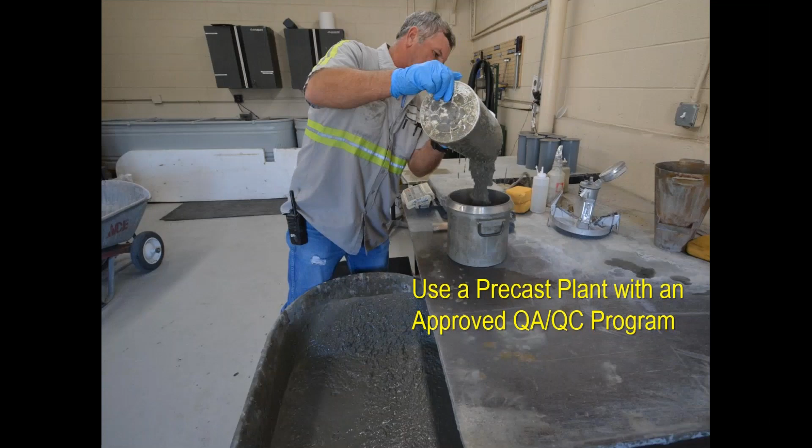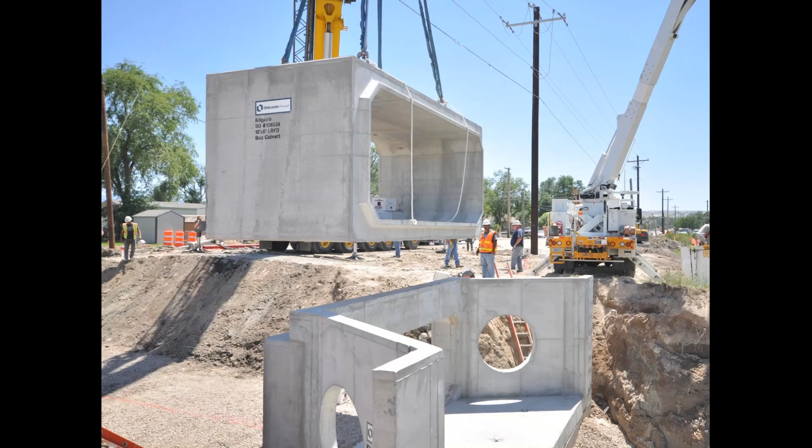One of the things that's important in this process is to use a precast plant with an approved QA/QC program. There are different programs out there, and different manufacturers have their own programs. So that's where we'd ask you to coordinate with them and see what is typically done in your state. That's really important. It's one of the things that is really well done with our product, we're able to do in-house QA/QC.

Now, this is a project that happened about 10 years ago, and I'm going to talk about this just in general so you can get a feel for what we're talking about. This was a 3-lane highway, and a city wanted to update the box or the piping that went across this road for a canal crossing.

And when they came and did this, it was designed originally, and you can see this here, it was designed to go across this 3-lane highway, and they were going to widen that out to a 5-lane section. And when they got their first plans in, they looked like this.

And Jason, I'll ask you, what would be the first clue on this that it's not a precast box culvert? Well, when I look at the detail there that says section through barrel, I notice there's no haunches in that detail. Right. So this was designed as a cast-in-place box culvert by the consultant, which was fine.

And the city came to us and said, 'Can you do a 16x9 box or a 16x6 box culvert for this crossing in precast?' And we said, 'Sure, we can. That fits what we have in our standard forms.' And the city said, 'Well, we really want to consider that because of the time savings.'

He said, we're concerned that when we go and have to shut down this highway, we don't want to deal with the residents. There's a lot of neighbors out there. This could take a month if it was cast in place and we could be shut down, where how long would it take you to do in precast? And we said, well, you could probably set this in a weekend, which is what they ended up doing. And with that, they were able to open that up to traffic again very quickly.

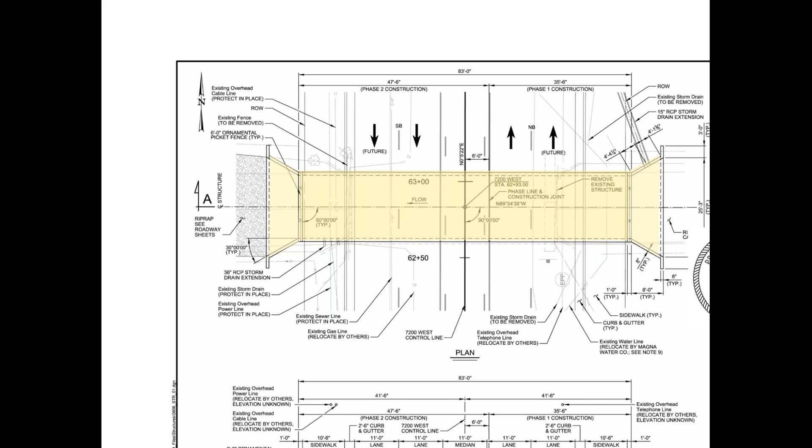In the industry, we call this accelerated precast construction. It's a concrete industry term. It really goes back to FHWA and AASHTO. They're looking for Every Day Counts. We need to maximize and speed up our construction. And in FHWA and AASHTO, they refer to this as accelerated bridge construction.

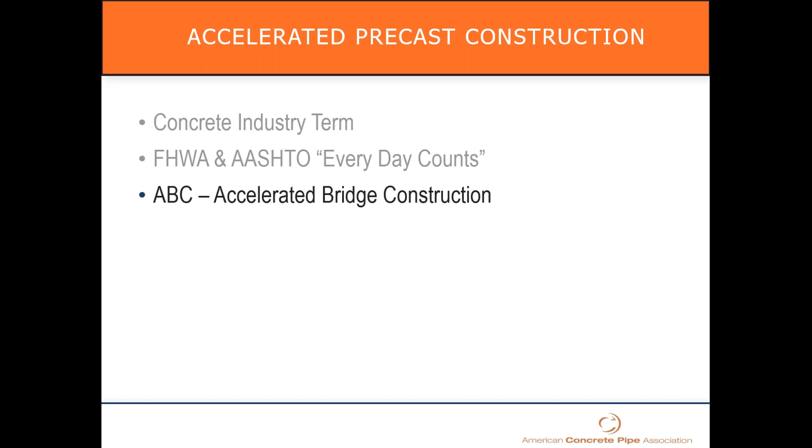But we like to point out that accelerated bridge construction is not just girders and overhead things, but some of these underground structures. What that does is when we use innovation to schedule and design and manufacture and do all those things, it reduces our on-site construction time. It reduces our costs. It improves safety.

One of the things that's great about doing things in an indoor climate-controlled manufacturing plant is that we have less accidents and less lost time on that. There's many of these plants that will go years without a recordable accident. And that's so much more difficult to do when you're out on a highway, when you're out in the elements.

There's also a reduction for road user impacts, these costs of people sitting delayed in traffic. So that's what we're kind of talking about today.

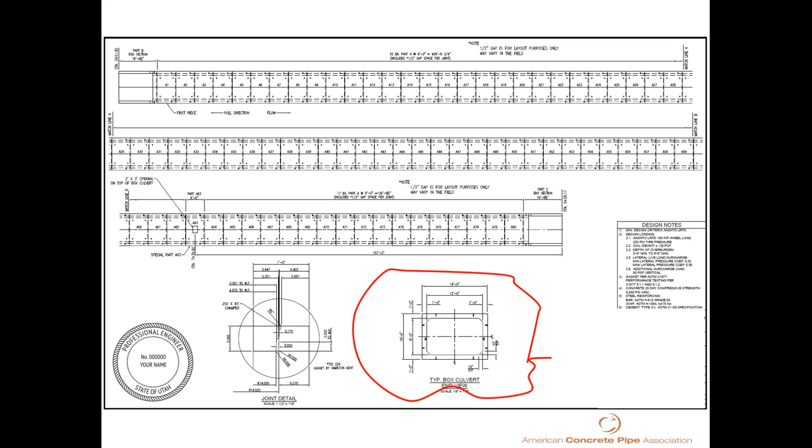Now, when you go out to a precast manufacturer, one of their responsibilities is to give you the layout and the design. You can see here that this is the typical section for a precast box. This will show the haunches in it. You might have other things in the design, openings for manhole access or maintenance access. You may have elbows or other things that come into this process.

The manufacturer is also going to give you a steel design. You can see here that he's laid out how he wants the steel done, which is specific to how he's going to build this. So it's important that the manufacturer have a hand in that. This is what he would be submitting. It's important to have that stamped in your local state and have an engineer that understands what he's doing. Most of these plants have an engineer on staff or someone they work with that understands the precast standards that we're going to talk about.

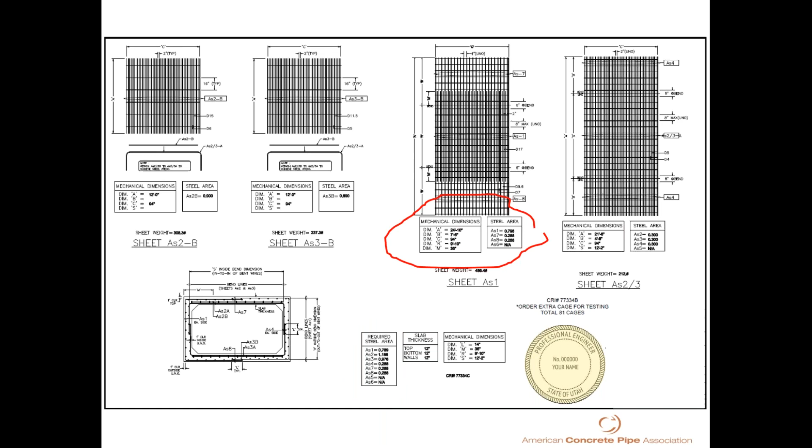You can see in here that he's done calculations to determine what the required steel area is. Now, as he does those calculations, he may go out and order the steel in such a way that it meets or exceeds the required steel. And that's what he's going to put in, and that's some of the things you'll check in a submittal.

Let's talk about the terminology. Let's say someone wanted to order a box culvert, and a lot of times they'll call me and say, I'd like a 6x12 or a 12x6 box culvert. Now, Jason, I'm going to put you on the spot. How should they do that terminology-wise? The span should be listed first, and then the rise or the height should be listed second.

Okay, and a lot of times we know, because typically for canals and other things, it's wider than it is high, but sometimes there's other things going on. So that's one of the things we always tell people. The other thing is the dimensions are internal dimensions. They're typically, most people's forms are usually set up in even foot increments, although there are options to do those in different increments depending on what's going on.

Hey, Randy, so Jason, why don't you take the lead? Oh, okay. A little pertinent to what your previous slide was before the rise and span. The question is, will this webinar be advising on the manufacturer's design principles and the number of recommended or required clips and steel design? Say that last part again, Kim. I believe they're wondering how the manufacturer does the design. Are you advising on that today? Well, Jason's going to jump into the design specifications and where the calculations go. We're probably not going to get into how the manufacturer does, calls out the steel and all that detail. That is not for today, but why don't we go through this a little bit more, and then some of these questions may get answered as we go. So, Jason, why don't you take over?

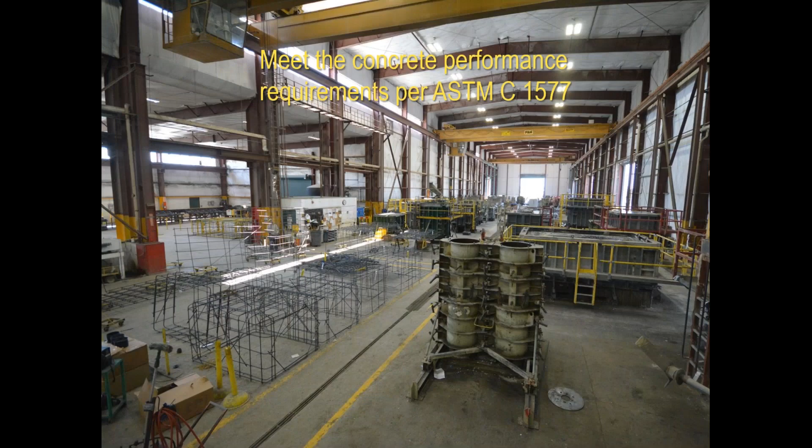We'll talk about some of the things with 1577, but then we'll also get into special design considerations. One thing that 1577 references is that we'll be using a 5,000 psi compressive strength. That is required for 1577. Additionally, you want to meet the concrete performance requirements that are laid out in ASTM C1577.

This next slide is just a picture of a table that is pulled directly from the specification. So this is the 12 by 8, 12 by 9, 12 by 10. It ranges in different sizes, but I just grabbed a few of these tables so you can see what you're looking at when you open up 1577. If you notice on the left-hand side, you've got the design earth cover. As I mentioned before, ASTM C789 would have been from 2 feet to 25 feet, and then 850 was 0 to 2.

So this has them combined. This can go from 0 feet of cover all the way down to 25 feet of cover. So that's on the left-hand side. And as you move across the page, you've got your steel areas, your AS1, AS2, all the way up to AS8. But if you notice, there's 3 numbers there: 12 feet by 8 feet by 12 inches.

So Randy, I'll put you on the spot. What is that 12 inches referring to? 12 inches is the thickness of that typical box culvert section. Okay, so that would be all the way around - top slab, walls, and bottom. Is that correct? That's correct.

Now I want to put you back on the spot, Jason. What if we had to go deeper than 25 feet? That's a great question. If we had to go deeper than 25 feet, we would have to do a special or modified design, and we'll talk about special designs in just a little bit.

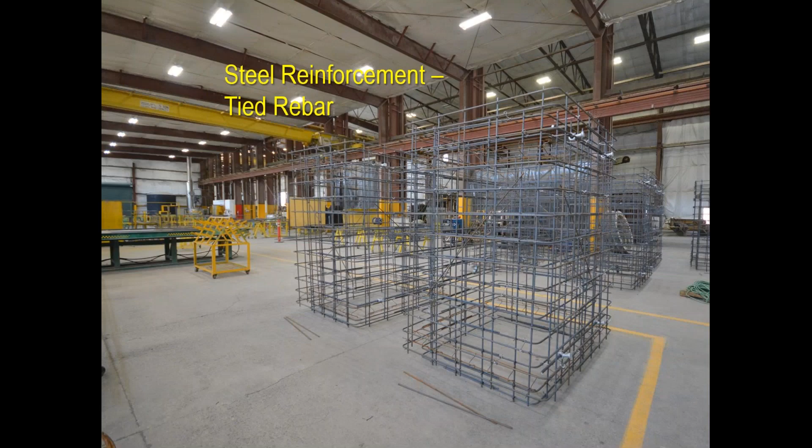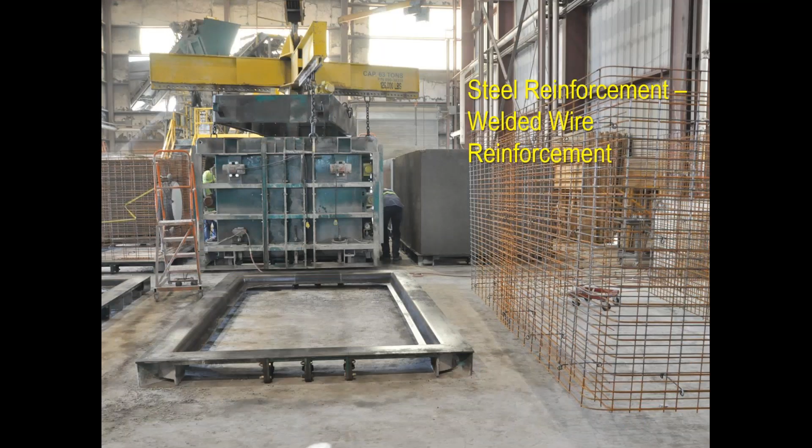So next we'll talk a little bit about reinforcement. There's 2 different types of reinforcement. This is a tied rebar - this is very common. Most of us engineers remember doing designs with rebar in college, and this is very common, and we use a lot of tied rebar. But there's a second type of reinforcement as well, and that is a welded wire mesh or welded wire reinforcement.

And what this is, this comes in sheets, like big sheets - it's like a welded wire mesh. You fold it and you bend it to fit the configuration of your box.

Now, one thing to keep in mind, that manufacturers need to look at when they're doing this, is rebar and welded wire reinforcement have different yield strengths. So if you're designing, or if a manufacturer's designing this to use rebar, and then they decide to use welded wire instead, they have to modify their design and change that because of the difference in the yield strength there. That's what manufacturers will keep in mind, and we'll talk a little bit more about that design and how that affects in just a little bit.

But I think Kim has a poll question for our manufacturers. We were just curious to see who - Jason, you may want to point out which has the higher yield strength, though. The welded wire actually has higher yield strength. Yeah, which Jason, a lot of people before don't know.

I launched this poll question, we got a couple of folks that had a couple of different questions related back to your chart that shows the different steel, the AS5, the AS2. They wanted you to go back over that.

What each one is used for. Okay, absolutely. Yeah, I think I got three different questions about that.

Okay, Randy, if you go back one slide further, and let's look at the table again. So these areas I should have pointed out, I apologize.

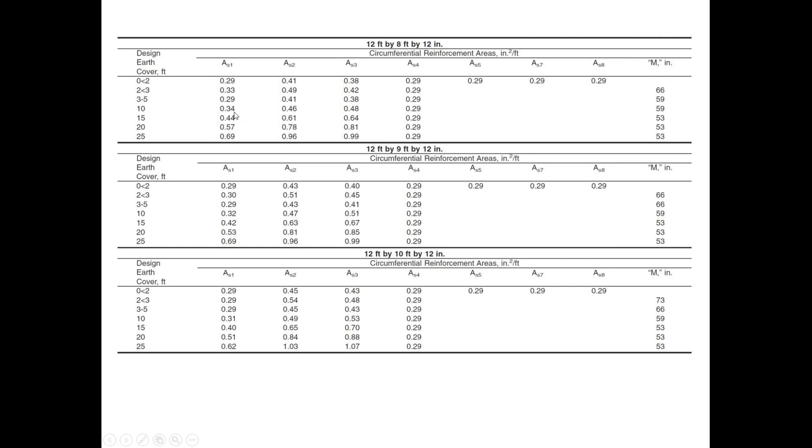So if you look at the AS1 column, let's say we're looking at 10 feet of earth cover, and we go over to AS1, we're at 0.34. That is 0.34 square inches per foot. So that's what that steel area is. And then as you go over, so AS1.

Now let's go back and look at the other drawing, or the other section. So AS1 would be that outside cage. It would go all the way around it for the 10 foot because it's just that outside steel cage.

AS2 is going to be your bottom, so that bottom reinforcement there on that lower cage, on the inside cage on the top slab.

Okay, let's go to AS3 there, Randy. So AS3 then is your bottom, but it's the bottom slab, and it's the inside cage there.

So those different areas, if you notice, some of those areas in that table are going to be different. So as you go through, you can't just say, well, we'll just put this much rebar, number 5's at 10, and put those all the way around it.

The manufacturers have to check and make sure that they're pulling the right design off of there, and they're determining what those steel areas need to be, not only just for the inside cage and the outside cage. Sometimes they can be similar, but at times you could have 6 or 7 different steel areas depending on where you are in the box.

So it's very important that the manufacturers are checking that table and watching it, and it's very important that the municipalities and the states are inspecting those to make sure we've got them right as well. Jason, that brings up a good point.

The point being, as a manufacturer, we may look at that and put higher steel in some of those, just because it doesn't make sense manufacturing-wise to split them all out. So we have to look at each box separately, and each manufacturer may do it a little bit differently. So right, that's a good point.

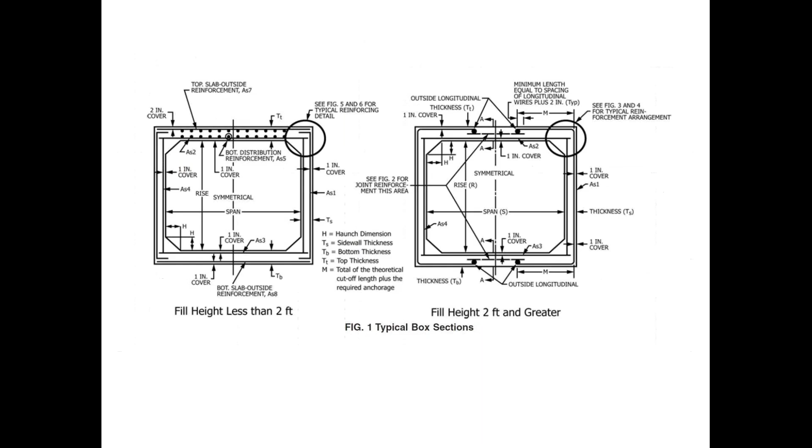The AS5 is the steel that goes longitudinally along the box, so that goes in each span. So if you've got a span, a lay length of 6 feet, that would be 6 feet of steel that would go along the lay length of that.

Does that make sense? So AS2 and AS5 are perpendicular to each other. Correct. Clarify.

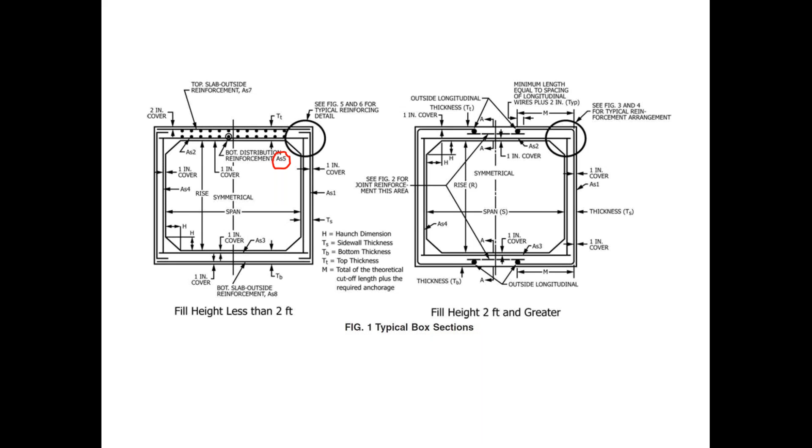Okay, well, let's keep going, and then some of these questions may get answered, and some of these may be another webinar that we do, maybe in more detail. This one's meant to be kind of an overview of how you would specify things. As a designer, you wouldn't need to specify any of that. You would probably need to be reviewing it and coordinating with the manufacturer.

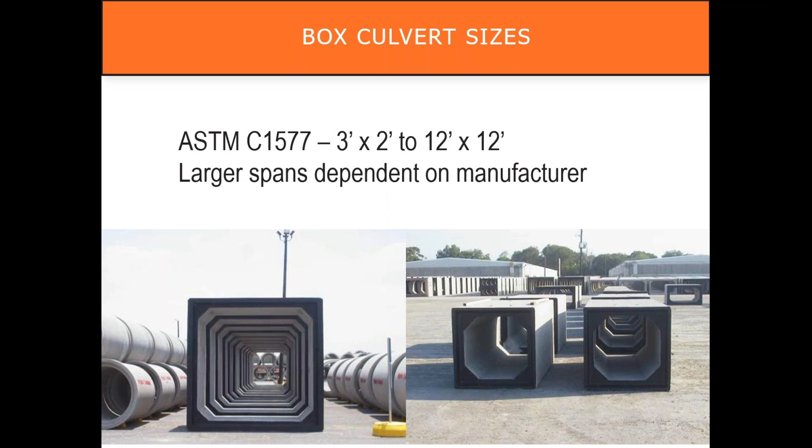So Randy asked the question earlier, well, what do we do if we have one that's over 25 feet? Another question would be, what if we need a 15 by 10 box or a 20 by 10? What if it won't fit in those sizes? That's when we need to look at a special or modified design. So a special or modified design would apply to any sizes that are not included in that table, like I discussed. If we need any modified thickness, if a manufacturer decides they can do their own design to change that thickness a little bit, so they can maybe save a little bit depending on the design and loading.

Also, if you do have different loading from what is put in 1577, as I mentioned, ASTM 1577 is an LRFD design, but sometimes we have to do airport loading with FAA, railroad with AREMA, or if they're really deep fills, there may be some different loads that we're not taking into account. So that's when we would have to do where our manufacturers would do a special or a modified design.

So when we do those, there's a few requirements that we look at and a few things that our engineers are reviewing when we look at these. First of all, we want to make sure they're a rigid frame and that there's 2 cages, we provide 2 cages in there. It's very important, and I'll show you why in a moment, why we need the 2 cages. And we're going to go through these pretty quickly because I'm going to go through each one in a little bit more detail.

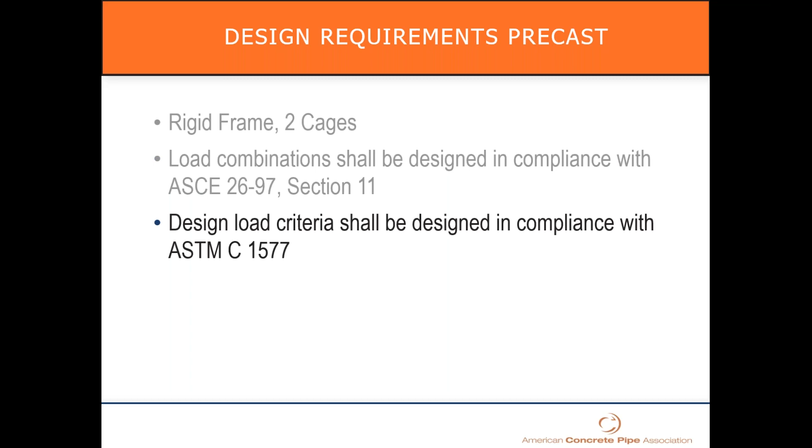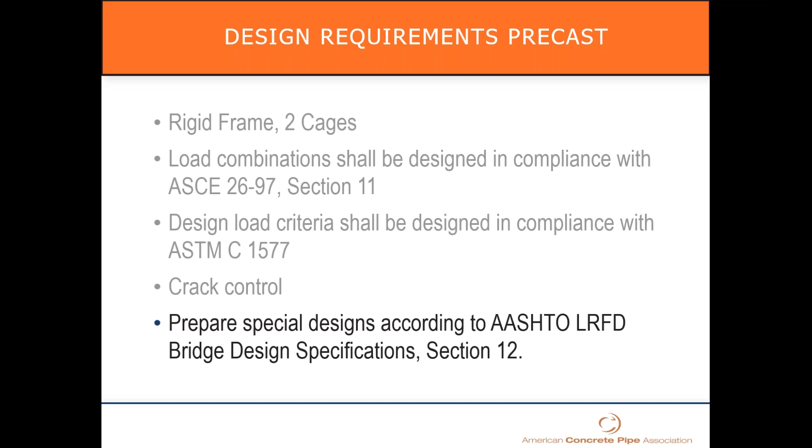So your load combinations are included in the ASCE 26-97, as I mentioned earlier. Design load criteria is included in C1577, and I'll show you what that design load criteria is. We also want to talk a little bit about crack control, that's something our engineers are taking into account while we're designing these. And any special designs need to be prepared according to AASHTO LRFD section 12, where applicable, obviously. But that's what we're recommending, and that's what we're doing in our market here.

So this is just a sample moment diagram. And the reason I show this, and I wanted to show this, is because you can see that you've got moments going from positive to negative. And so the worry is that if you're putting the steel in and you're only putting 1 cage in and you're putting it right in the middle of the box, you're kind of missing the positive and negative moment zones. You're missing those areas where it really needs it.

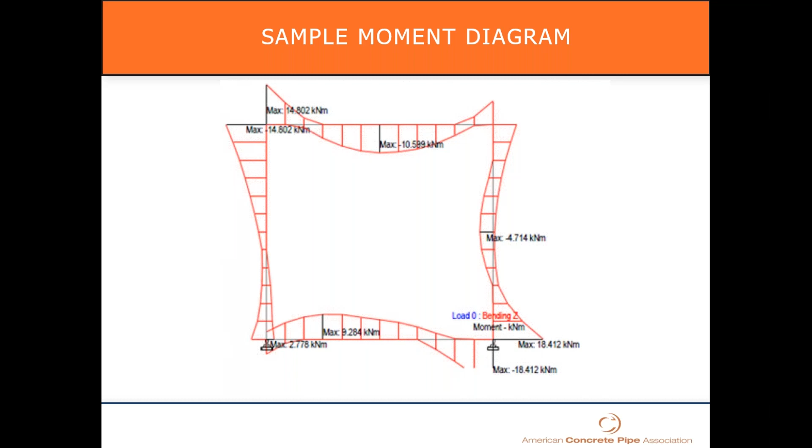Additionally, those moments kind of bend around the corner. So it's really important that we have the right amount of steel and the right number of cages, because if we only have 1 cage of steel in there, you may be missing some of these other high moments. If you've got the cage of steel on the inside and not one on the outside, then you're missing those positive moments around the outside there and around the corners, because that's where that moment shifts. And so that's why I show the sample moment diagram, because it changes a little bit there.

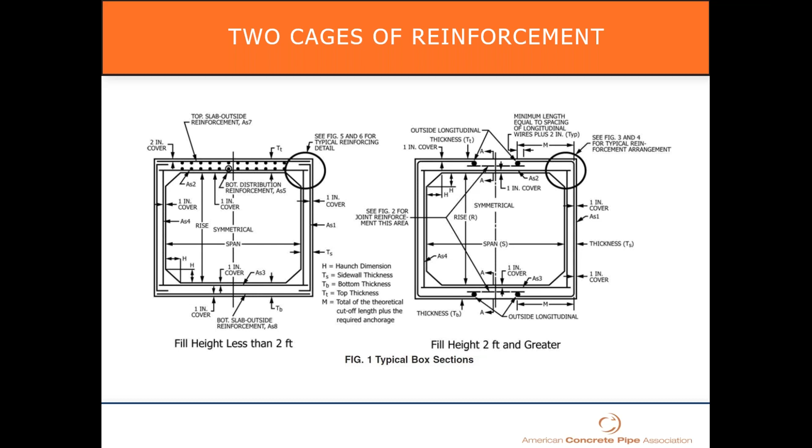This spec, again, we just looked at this, but if you notice on both of these, they've got the inside steel and the outside steel going around it. So this is ASTM C1577, it shows the 2 different cages of steel, 2 specific cages. So that's why we recommend that you do everything with 2 cages of steel.

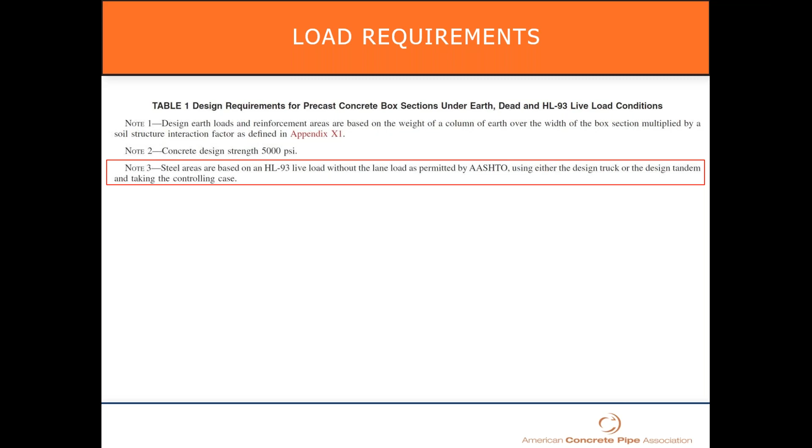This is the load requirements from C1577. If you notice in note 3, we already talked about the strength of 5,000 psi earlier, but note 3 is where I want to focus here. These are designed, the loads are designed on an HL93 live load. However, it's designed without the lane load, so keep that in mind. It's HL93, but you don't have to take into account the lane load.

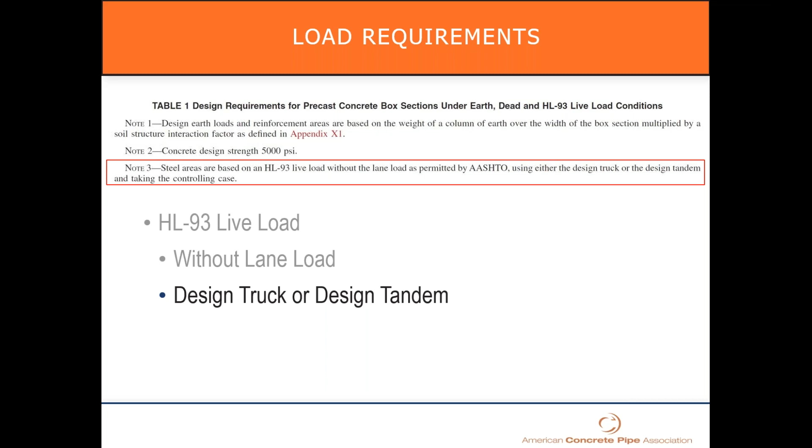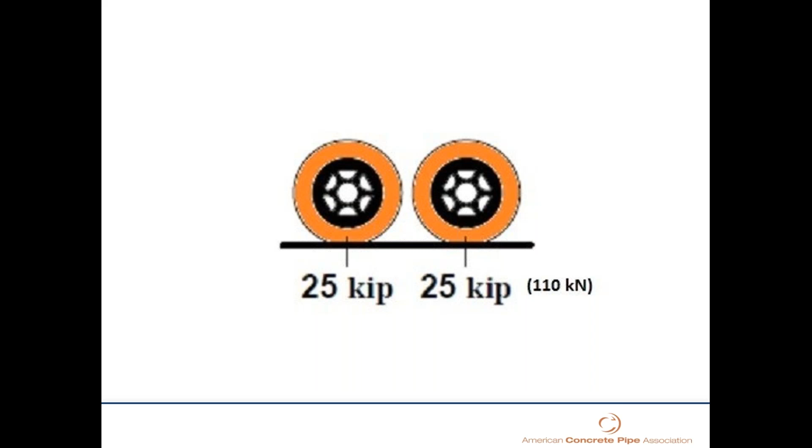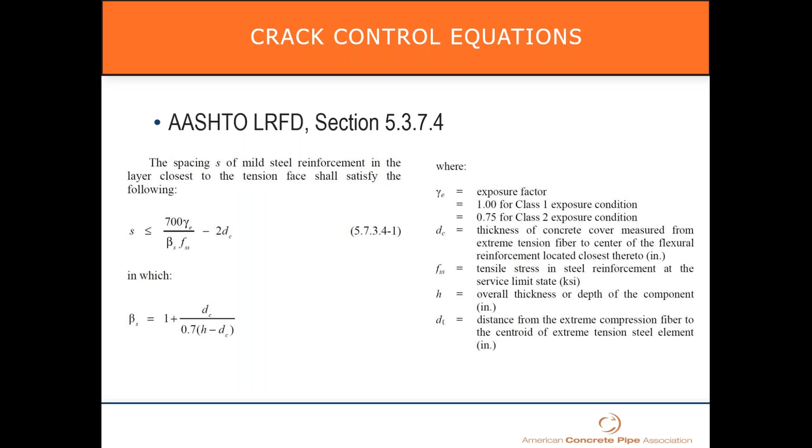One thing to keep in mind is that, in our experience, these AASHTO LRFD equations are designed specifically for larger, thicker walls with 2 cages of steel. We were designing some catch basins, and we noticed that in the smaller sizes with only 1 cage of steel right in the middle, the dc distance was throwing it off, so we were getting much deeper fills and depths than we normally would with 2 cages of steel. Keep in mind these AASHTO LRFD crack control equations were designed for thicker walls like you'd see in a box culvert, so you may have issues on smaller designs like catch basins and other underground structures.

This is the header for section 12. This is just what you would look at when preparing special designs with LRFD. This is the section that talks about buried structures and tunnel liners, which box culverts fall into.

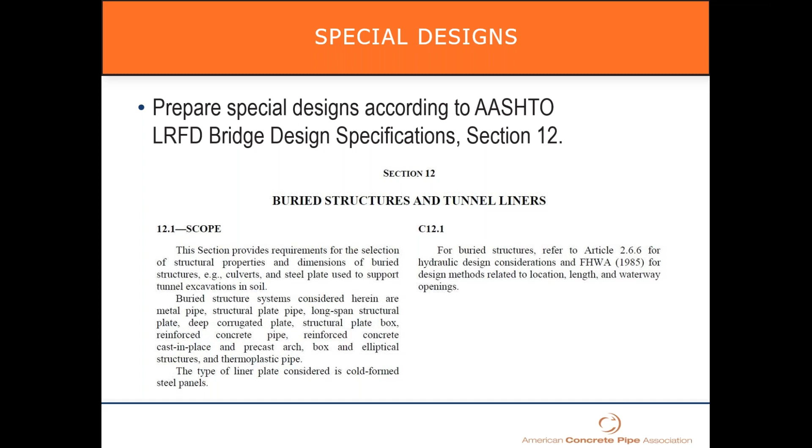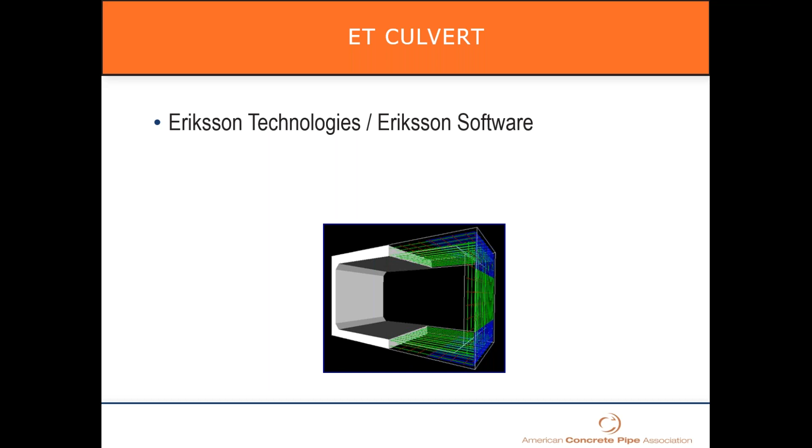One thing I wanted to talk about today is a software called ET Culvert, created by Eriksson Technologies. It's a rigid frame design and rating software. Eriksson Technologies has partnered with ACPA, the American Concrete Pipe Association, to make sure that all of the loads and everything we're seeing are taken into account in this software, along with our members and manufacturers and what they're using.

I wanted to talk about some of the benefits of the Culvert software and why manufacturers like it. It supports multiple specifications, including AASHTO standard and LRFD, AREMA, and CSA S6-06, which is the Canadian equivalent of AASHTO LRFD. If you're doing box culvert designs in Canada, that's the specification you'd use, and it's included in Culvert.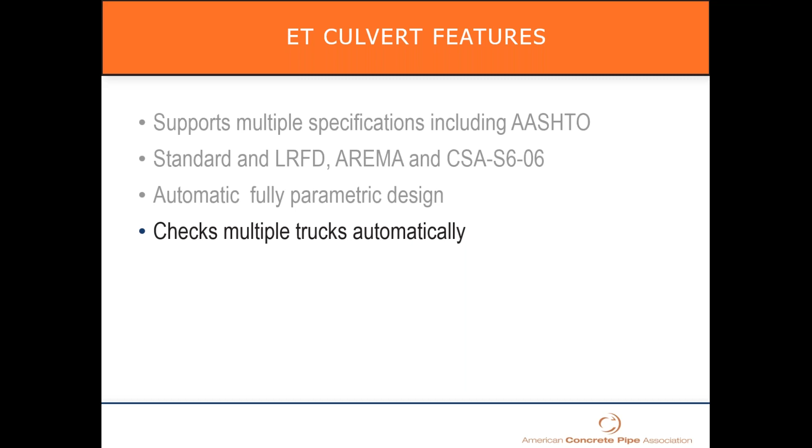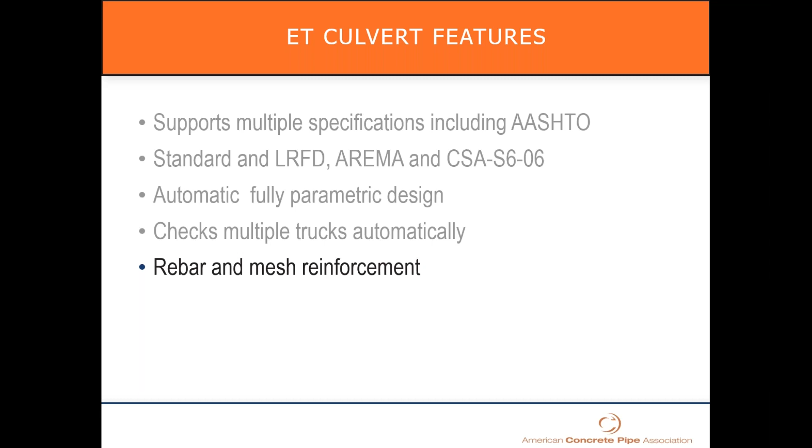It also has automatic fully parametric design. It checks multiple trucks automatically, so you can look at different design trucks and the design tandem automatically. It can also design for rebar and mesh reinforcement and compare the two. As I talked about earlier with the different yield strengths between rebar and welded wire, this program will run both and check them so you can determine which to use based on your inventory and what your manufacturers have available.

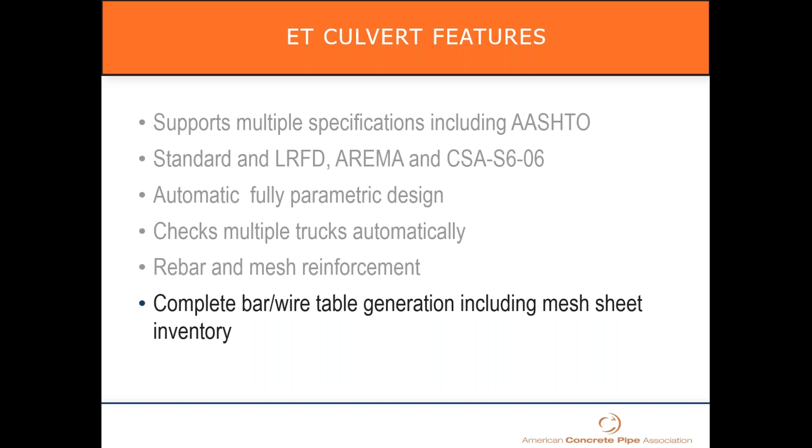It creates a complete bar and wire table so you can determine what you have in inventory and what you need to use, then order and have everything prepared and ready to go. It's a really convenient program, and ACPA has teamed up with Eriksson to make sure it covers what we need it to cover. We're really happy with it.

Next, I wanted to talk briefly about hydraulics—Manning's roughness coefficient—and point out a few things. When testing in the lab, obviously it's a very controlled environment, but we were able to get a Manning's N value of 0.01, which is pretty low.

It's pretty impressive that they can get that in these precast structures. However, the recommendation is that we use a 0.012 for storm sewer. This would take into account some of the things we're seeing in the field, and it would more closely duplicate field conditions.

Even though in the laboratory we can get a low Manning's N, the recommendation is to drop down to a 0.012 for your design purposes. Now, if you were to pull a table and look at a box culvert, a concrete box culvert, some tables show a 0.015 and not a 0.012. The reason is that 0.015 is for cast in place box culvert. A lot of times those cast in place have rough form marks on the bottoms and on the sides.

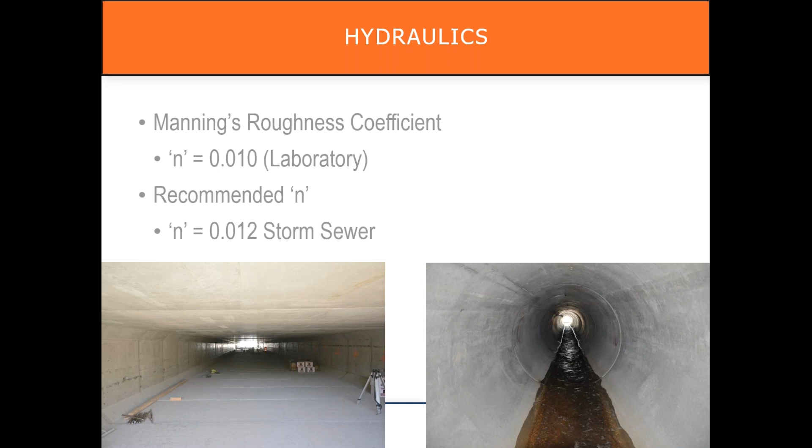Those rough form marks would increase your Manning's N from a 0.012 to a 0.015. So keep in mind, if you are using precast or specifying precast, you can use a lower Manning's N, which in some cases can decrease the size of your box and could be significant cost savings to the city, the DOT, or whoever your client is. Keep that in mind, the difference between hydraulics of precast and cast in place.

Another thing that C1577 discusses is skew. If you look on the left-hand side, this is a picture of a box that goes straight across the traffic, so it's perpendicular to the traffic flow. Our flow of our stream is perpendicular to traffic flow, so that would be a zero skew or no skew in this case.

C1577 says that the designs included are applicable and acceptable up to a 30-degree skew. So if that stream or box is skewed up to 30 degrees from traffic, it's okay, you can still use those tables. However, anything over 30 degrees, you have to do a special design.

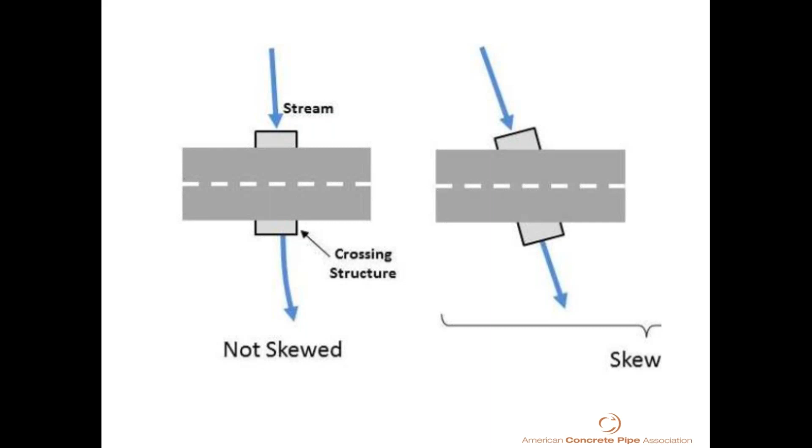This next picture is a drawing of a project where you can see, on the left-hand side, you've got your box culvert running from left to right across the screen. Just above it, you've got the SB and the NB, the southbound and northbound lanes. So they've identified what your skew angle is there, and if you notice where the cursor is, that says 27 degrees.

So at first glance you say, oh, it's only 27 degrees, that's acceptable, we can use these designs. The problem is that's 27 degrees from the horizon - we need to go from the vertical side, right? So it actually is about 62.5 degrees. It's more than double what the acceptable amount is.

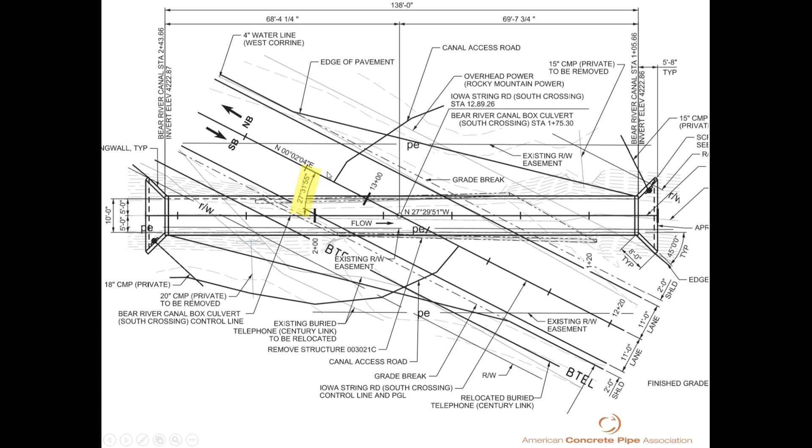You've got to be looking at these and determining what the skew angle really is. In this case, where it's 63 degrees, you would have to do a different design because of the way that traffic is interacting with our box culvert and our steel layout and design - where maybe before your hoop steel was the load bearing steel, now it becomes your longitudinal steel. So you've got to take into account that if it's beyond 30 degrees skew, you're going to have to do one of those special or modified designs and check the load rating.

And speaking of load rating, I know Randy is pretty passionate about load rating, so I'll let him talk about that for a minute. Kim, do we want to, I know we're about 15 minutes, and I think we can push through and finish for everyone in about 15 minutes, but why don't we take another poll question real quick? Okay.

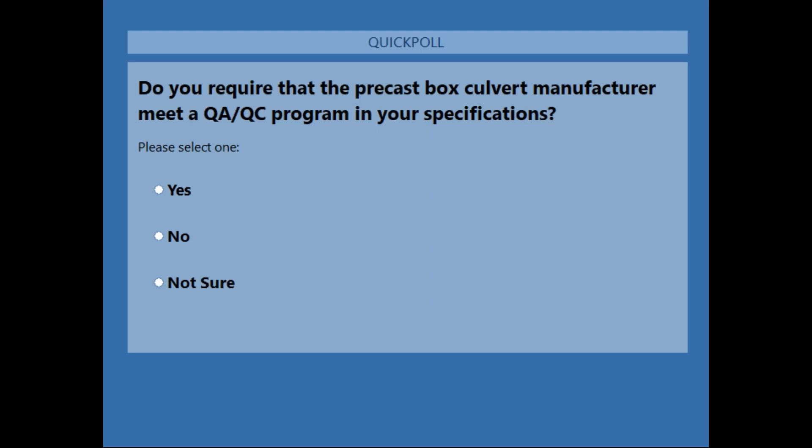All right, I'm going to close that and we'll show the results. So it looks like 67% do require some type of QA/QC program. That's great. These polls are interesting and they help us to know what's going on in the industry better.

So as we talk about load ratings, in FHWA, a 20-foot span is considered a bridge, and 20-foot spans need to typically have load rating depending on what highways they're on.

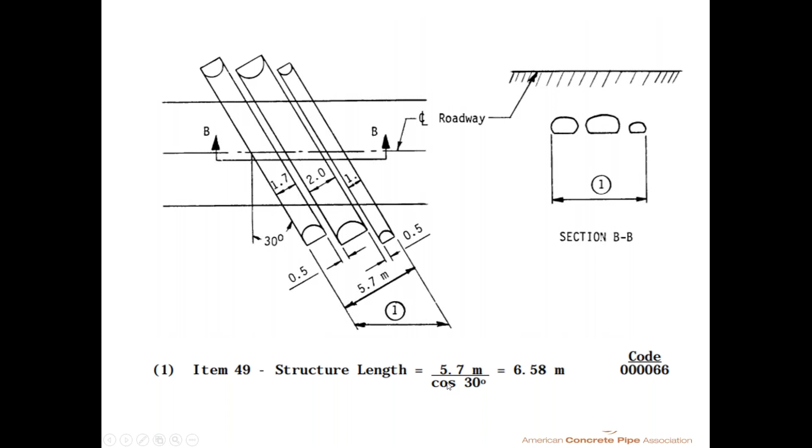This is out of FHWA guidance. It shows 3 culverts, and if you look, they measured this the actual span if it's skewed along the center line of the highway. So this section BB would be where they would look at that length, and they would take the cosine, divide by the cosine of that skew angle to come up with whether it was a 20-foot span or not. In the case we're looking at, a 10-foot span at 63 degrees actually became a 22-foot length across the center line of the highway, and needed to be load rated in that case.

So there's things that come up. I would work with your look at your local state requirements, how things need to be load rated if they're load rated, and it does introduce other things into the design that you should coordinate with the manufacturer.

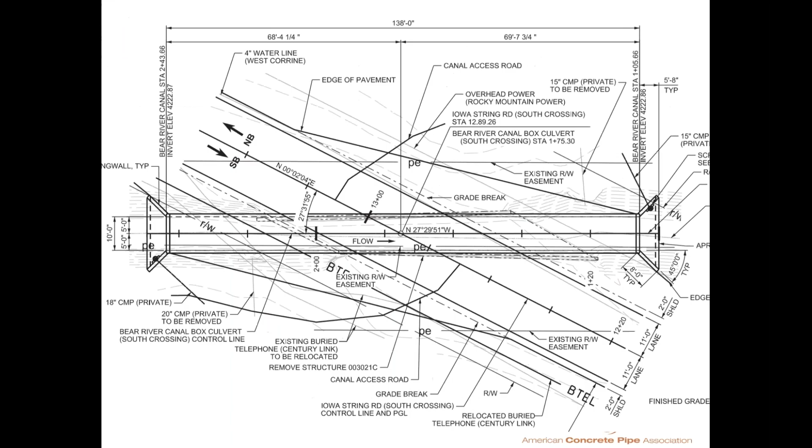Now, to summarize what we've talked about earlier, when you go in and do this, people have asked me, what do I say on the plans if I just want to do precast? So this is an example note. I don't know if this is ideal, but this was: install a 10x6 precast concrete box culvert. The selected manufacturer, so you don't know who it is yet, but they will design, stamp with their professional engineering stamp, and submit a box culvert for your approval that meets ASTM C1577 and whatever other project specifications you have. So you need to outline those in your project and have good specifications. And that's another thing we could talk about in another webinar at another time, all those things that could come up.

One other thing we wanted to point out, and it's interesting, we had someone tell us, well, on this project, cast in place was so much cheaper. And we thought, that's really strange. In fact, with cast in place, you typically have to have different cover requirements and different things in there. You probably will need to have more steel if it's designed correctly, similar amount of concrete typically. And we went out and looked at a project, and they had like 40% of the steel of what would have been in the precast. And we've looked at some different plans, and sometimes people aren't following these AASHTO standards, and there might be other types of structures out there. Everything ought to meet an appropriate design standard if you're comparing them, and that's important when doing a bid or doing specifications.

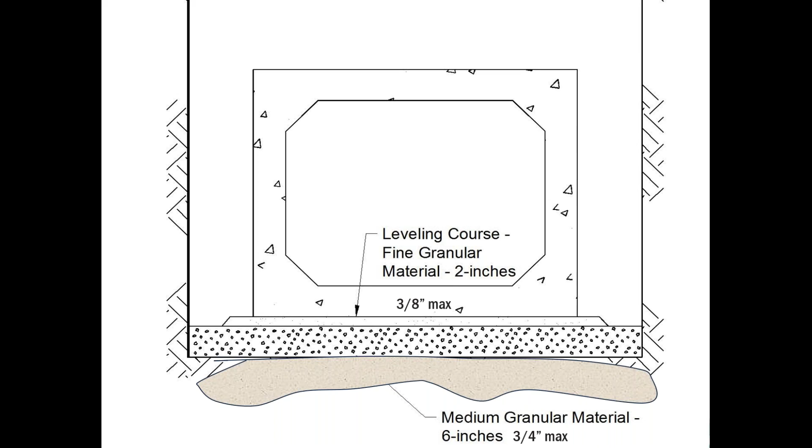If you've got soft soils, which are not uncommon in a canal or other rivers and streams that you're in, you may need to over excavate that. We really like to recommend you have a geotechnical report, that you look at what needs to be done, because we will just typically call out a minimum of 6 inches of granular material. We like 3/4 inch max, a small material in there, not real big things. And the reason why is you need to have this very flat.

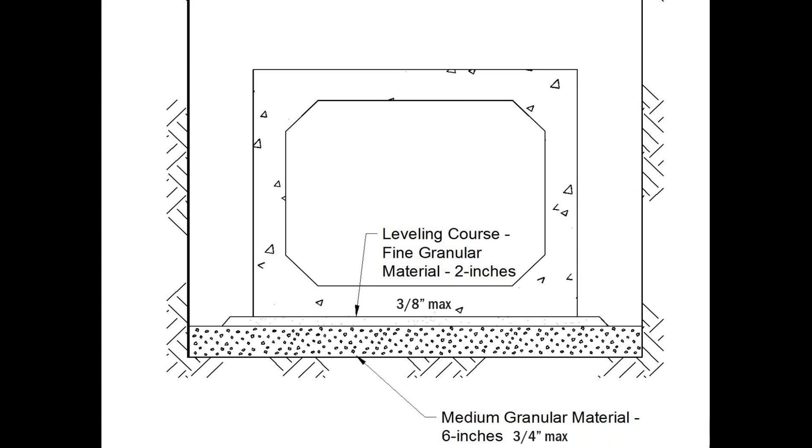Now, the other thing, Jason talked earlier about ASTM C1675, which is the installation requirement. In there, it calls out a leveling course. Now, we like a pea gravel or a sand leveling course, something that can be raked. This isn't meant to be structural, but what it's meant to do is have that box sit very flat. So as we go through and look at those, one, we want to have a laser out on the project. You need this for horizontal, but you also need it for vertical control.

Hey, Randy, I have a question for you, since you asked Jason and Jason asked you. So oftentimes we get the question, is concrete an acceptable leveling course?

It can be, but what you have to recognize is, when we manufacture these, they're manufactured on forms, but there may be some little variances in the forms. It may not be completely flat along the bottom. So we had someone that came in and said, we're going to do a crushed concrete. And it was very difficult to work with, and very difficult to ever get flat, and it would never match the exact flatness of the box. So I would still recommend that you'd have some kind of leveling course in between, because a pea gravel or a sand or something like that can level out to match the minor imperfections that are in a box. Concrete to concrete, you'll never have it match up exactly. And that's my opinion. So yeah, that's my opinion as well. We never want to see concrete as the leveling course for the exact reasons Randy just talked about.

One other question similar to that is: is CLSM an effective leveling course?

You would have some of the same issues if you're going to do it. It would be difficult to level out. I don't know how you'd ever get it to match. You can even get mud on the bottom of a box culvert, and we recommend cleaning that off. But those little things that go in there will make it very difficult.

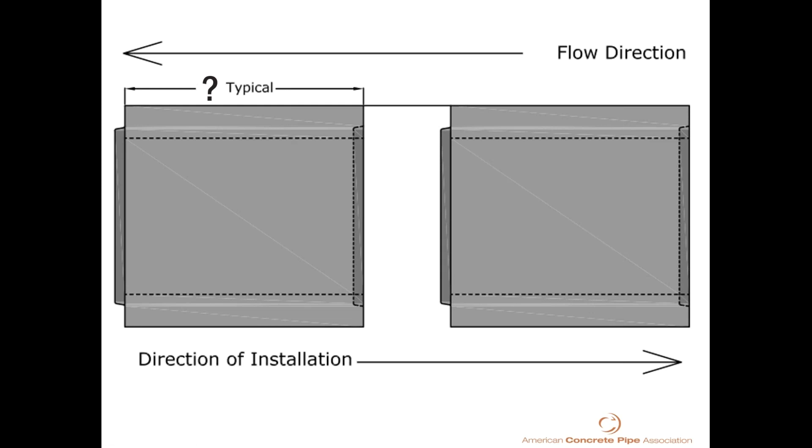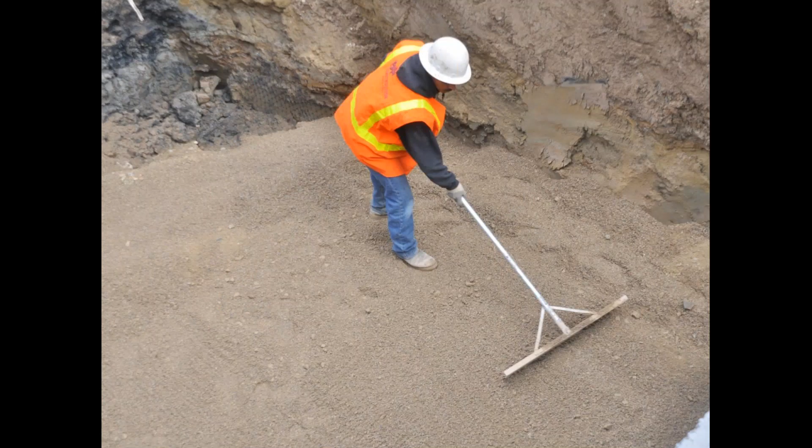As you go there, you'll see that they rake this out. Now you could use screed boards, you could use different things. We've seen different contractors use different things. We don't try and get prescriptive about how they'll do it. What we try and be specific about is that they are getting it very flat and that they're checking grade, cross slope, longitudinally all the way around.

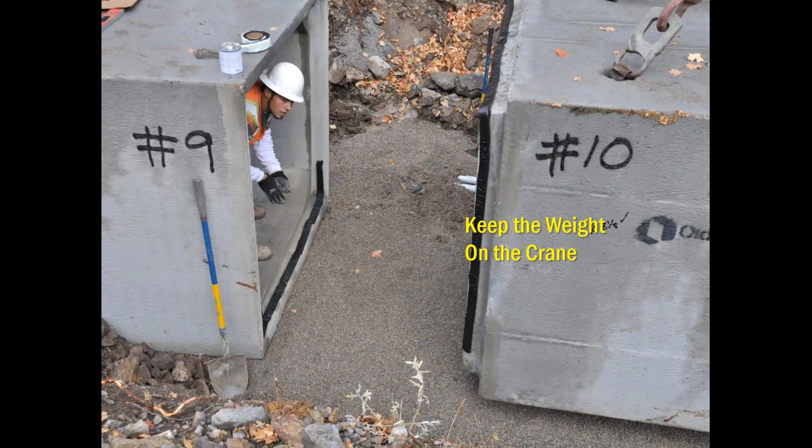You want to keep the weight of the box on the crane as you're getting it there. So what he's going to do with this is he's going to bring it very close to that other box before he even starts to lower it. In fact, he can have it almost inserted there before he starts to lower it.

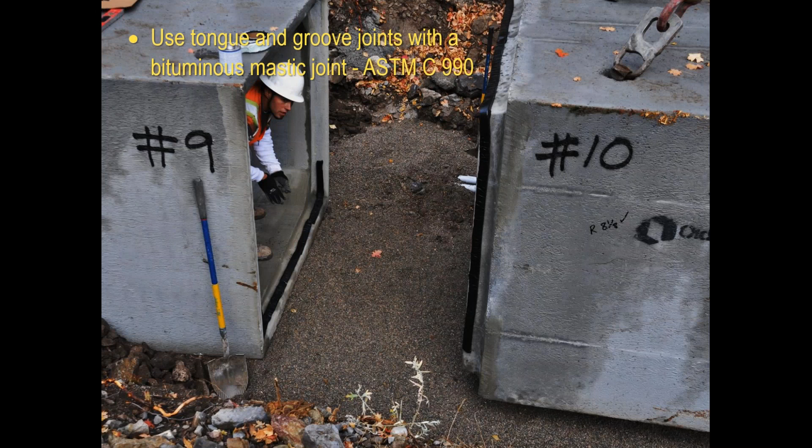Now we're going to talk about mastic. Mastic's probably one of the more common sealants. There's different things in different markets, but a bituminous mastic joint that you can see in the photo is specified in ASTM C990.

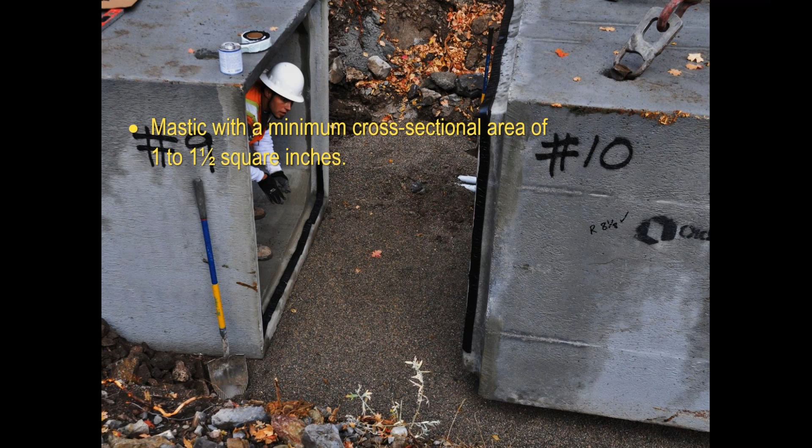You want to make sure you have the right mastic area. We recommend 1 to 1.5 square inches. We have had jurisdictions that have said, well, if mastic's good, double mastic would be better. And double mastic is not a better situation.

These box culverts have an annular space that's designed to accept that mastic that's called out. And if you double up on that, they're not going to go together well, and you're going to have other problems. Mortar grout is not required in these joints, but with the mastic joint alone, they're not considered watertight or pressure rated.

Now, if you have a watertight or pressure job, you can do other things as far as sealing these, like other sealants on the inside. This job we talked about had a long run with no leakage, and they used an interior sealant on all those joints because they had special requirements. If you had a pedestrian tunnel, you may not want even a little bit of leakage.

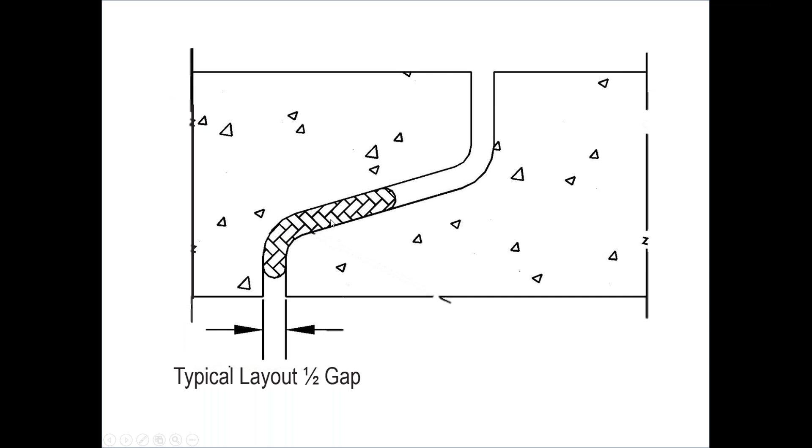In most cases, a mastic alone achieves great water savings over what they've had in other cases, where they've had so much leakage that they really haven't seen very little with the mastic joint. We find a contractor typically can pull these to an average gap of about a half inch, which is recommended and fine. The mastic is placed on the leading edge of the tongue, and it rolls back as the tongue is pulled into that joint.

Jason, I'm going to ask you to do a little bit of quick math. We've got 12 boxes here with 6 foot lay length. So why would that add up to 72 foot 6 inches? Well, each box should have about a half inch joint gap there. They're designed to have a joint gap, so 12 times a half inch would be an extra 6 inches, so 72 feet 6 inches.

So that's great, but that's a critical part to recognize. If you've got a long run and 400 boxes, and the contractor does something different than the layout—if he had an elbow or a manhole or something he was coming to—it would either shrink or grow depending on how he's doing that. So that's something you need to keep in mind.

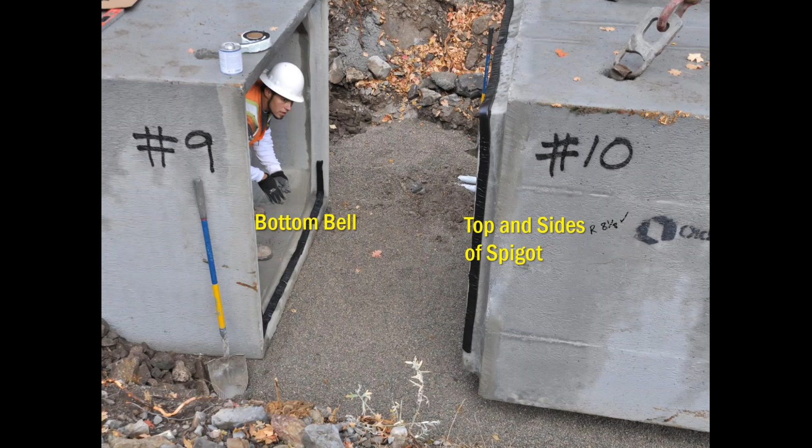Perfect timing to go back to this picture. There was a question of why some of the mastic is on the bottom and some is on the top in this picture. Yeah, I'll explain that. As you can see, we put it up to the haunches in the tongue or the bell. The reason is if we tried to wrap it around the tongue—the groove is where we put it—if we tried to wrap it underneath the tongue, it would just fall off.

A winter grade mastic—on this topic, it's an interesting question dependent on your region. What type of sealant would you recommend? Well, you're going to have to work with each of your regions. A lot of times here we'll use a winter grade mastic. We'd be working out there today, and we may have the contractor put that in the cab of a truck or something to keep it warm, but it's winter grade mastic below 50 degrees. If you're in other jurisdictions, you may do other things.

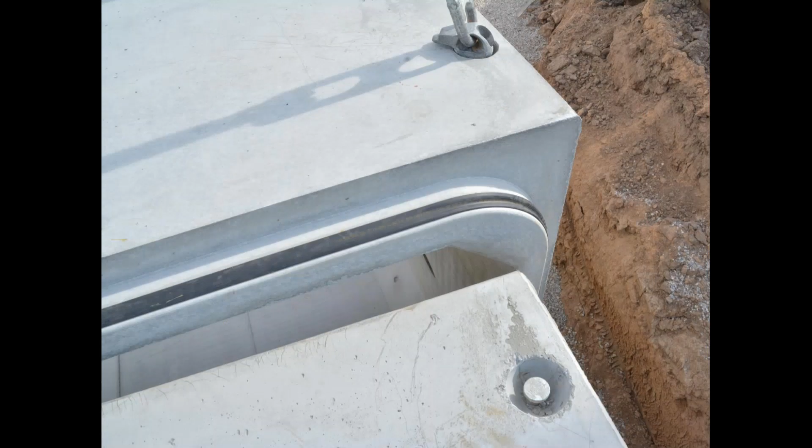Now, a gasketed box culvert is also something there's a spec out there for, but it's not available in every region. So you want to coordinate with your manufacturers because this needs to have a rounded corner on it to do a gasket, and it takes a lot of modification to the forms and everything else. So it may not be available yet, but that's another option that's out there. We're trying to keep this general because local manufacturers may have ways to do things that are better for their market, and it doesn't mean these aren't all functional—there's not one right way to do anything.

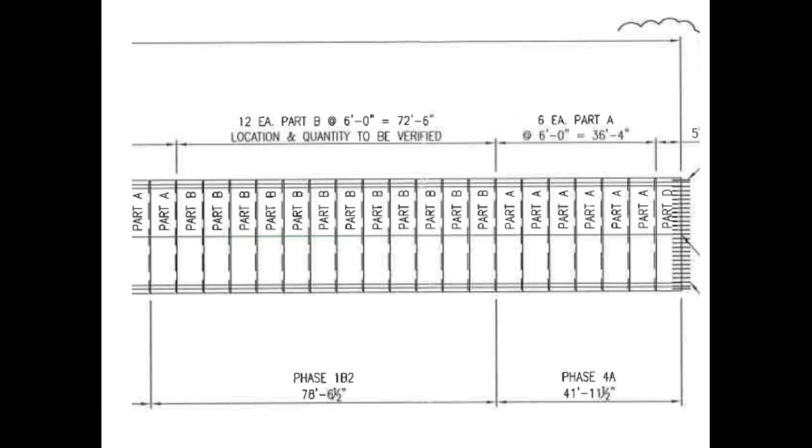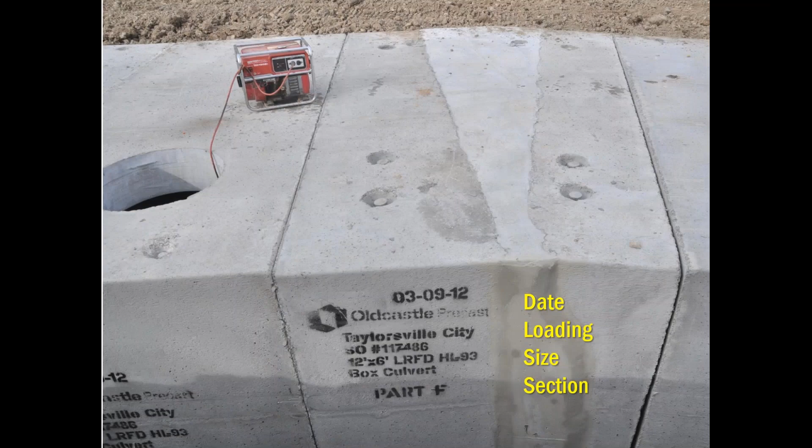So as we go through this, we talked about the half inch gaps. This was an example where they used shims within the box culvert to pull that together so they could know where that half inch was. So we've seen that done. The box culvert should be marked, and this is in the specification.

The date, the loading, the size, and the section. You can see here that the manufacturer's name was on there. You can see this part F. This part F indicated on the plans that an elbow needed to be there.

So the contractor needs to make sure and find that part F. Now, it's sometimes not that hard to find, but he may have different elbows in the project, and these can be made. He may have different manhole openings or maintenance openings. He may have different loadings on the project where part A and part B are designed for different depths of fill, so he needs to watch those.

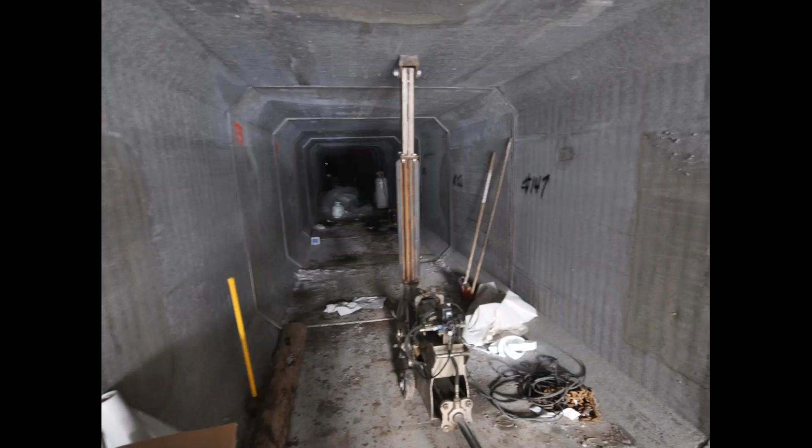Now, as we get into installation, this shows what was typically used as a manhole puller. The manhole or pipe puller was wedged into the box culvert, and then hydraulically these would be pulled back together. You can see where they use these I-beams to pull these back.

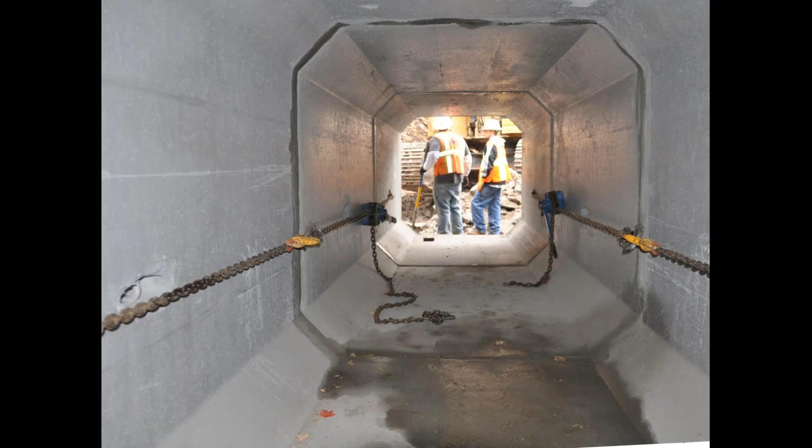Now in our market, we've done something a little bit different. We've used pulling inserts, and we actually pull them together with come-along devices. But what you don't want to do is push those together with equipment, because they'll bind up and you'll have other issues.

Now, as we talk, we're just going to finish up here real quick, and then we can take some other questions from those of you that want to stick around and have questions, and the rest of you may be done or not. But as we talk about scheduling, the contractor needs to really know the weight of each section.

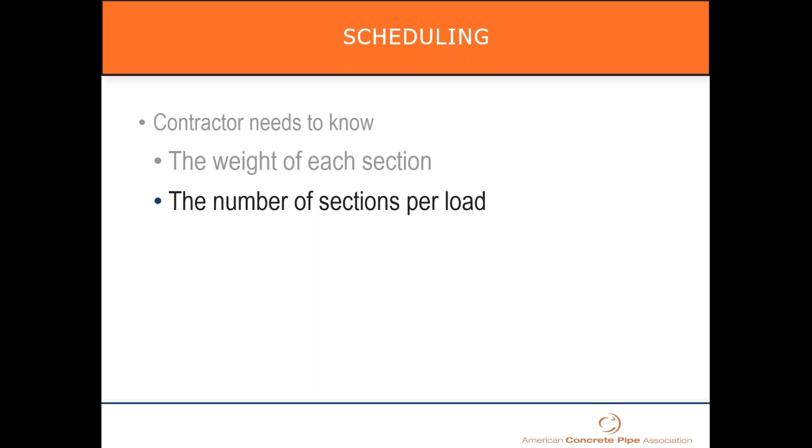We find that the contractor sometimes wants to skimp on equipment, and maybe he doesn't have the capacities he needs. So we try and work with them on pre-con meetings, make sure he understands the weight and the boom length, the number of sections per load. He needs to know what's coming, he needs to know what joint sealant's going to be used, and he needs to know a delivery schedule.

Often we start out, when we deliver, that early on in the project, we're setting up the alignment, we're getting going. That first box may take an hour, where subsequent boxes may take half hour or 15 minutes each. So it's important to coordinate that with the contractor, how the trucks are going to arrive, the different things.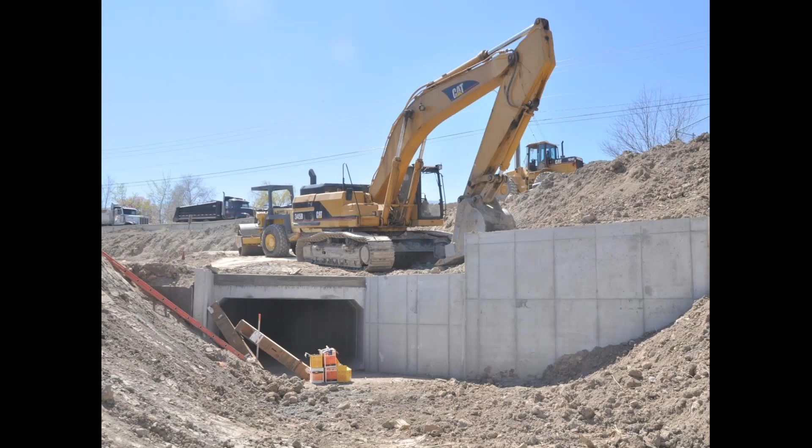We wanted to point out that some jurisdictions think that all the wing walls need to be cast in place. These are precast wing walls out here to the side. Those were 3 pieces that came together. They have footings down underneath them. They're weld plated together. They're an option that's available.

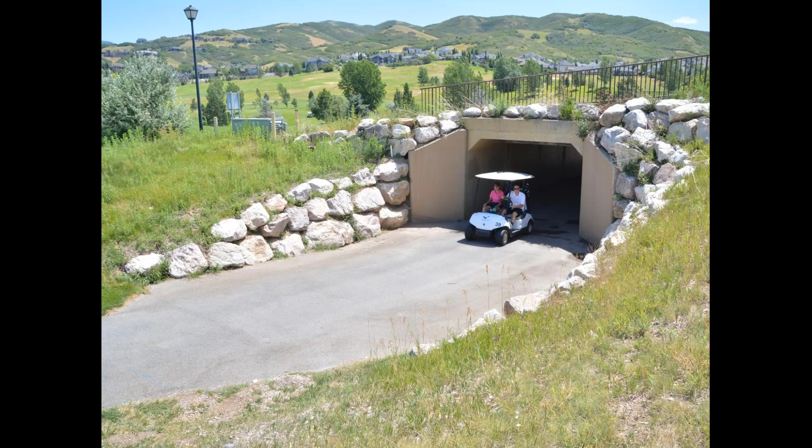We need to recognize that these aren't just for waterways or culverts. These could be pedestrian crossings, or my favorite, a golf course crossing.

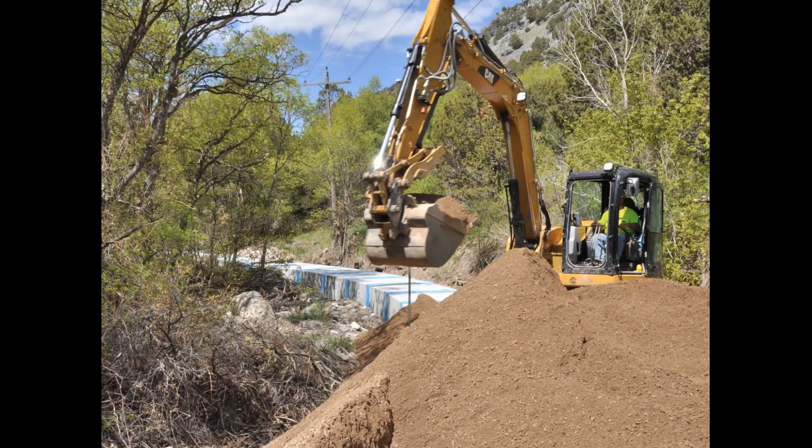In the specifications, you need to call out the backfill and get this backfilled correctly. Now, you'll remember that Jason designed these, or talked about these being designed for 0 feet of cover. As you're backfilling that, there's options to get equipment out there, but it needs to be consistent with the design. And we always recommend they put some material out there so they're not just right out on top of the box culvert.

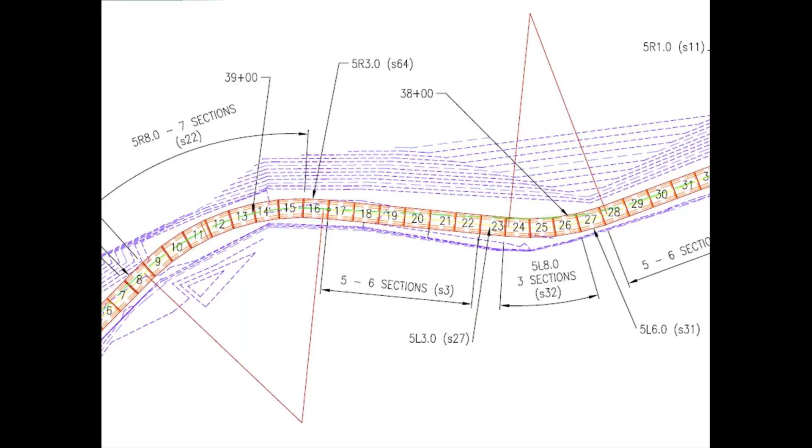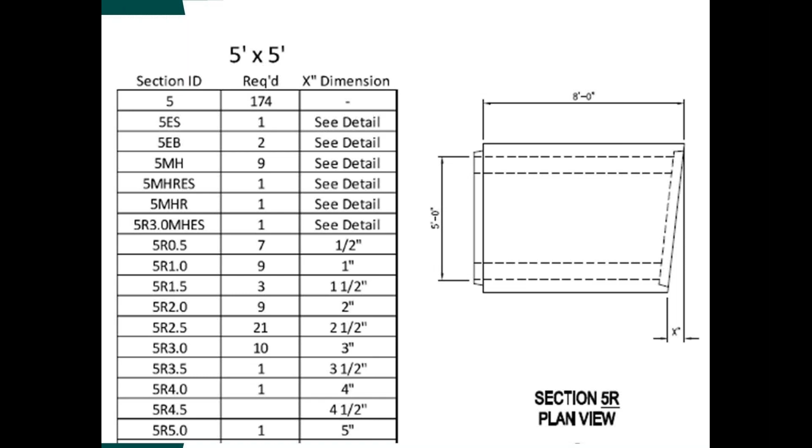There are other projects we've done. We've done beveled box culvert. This is a plan that went up, and you can see we made the ends so they weren't perpendicular. So this is something that your manufacturer might be able to do. This shows a box on the right with a 5-inch bevel, which, as we put all these bevels together, we were able to fit a very tight alignment with a lot of curves that we typically wouldn't be able to do.

So that's a lot we put into an hour there. Please send us comments about other things you may want to go over. We'd be happy to have other people at ACPA and other people talk in detail about other parts of this process. So this is just kind of an overview.

But what you've learned is you can design this and have your manufacturer design it to the right loads and specifications. You can specify these, and you can go in and put these in your project, and then you need to coordinate the contractor installation. So with that, hey Randy, before we open it up to questions.

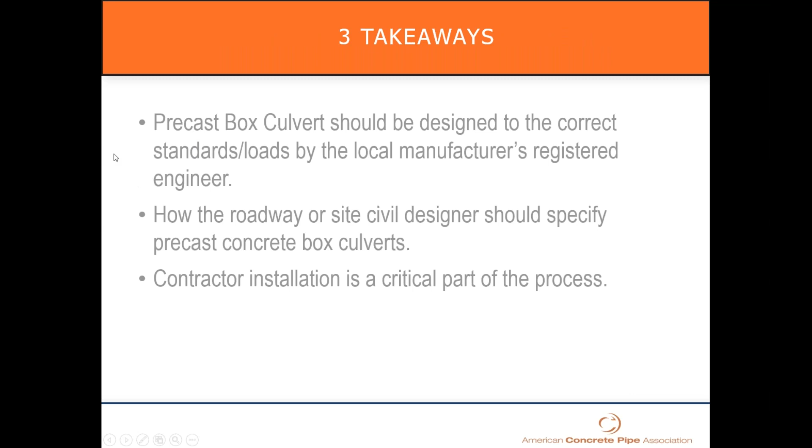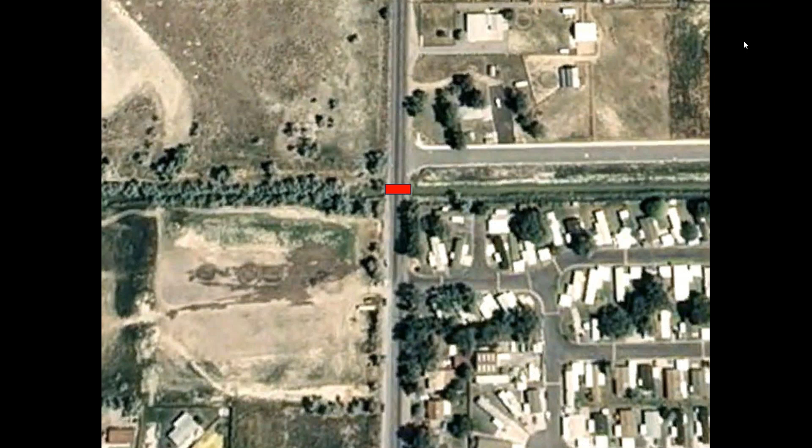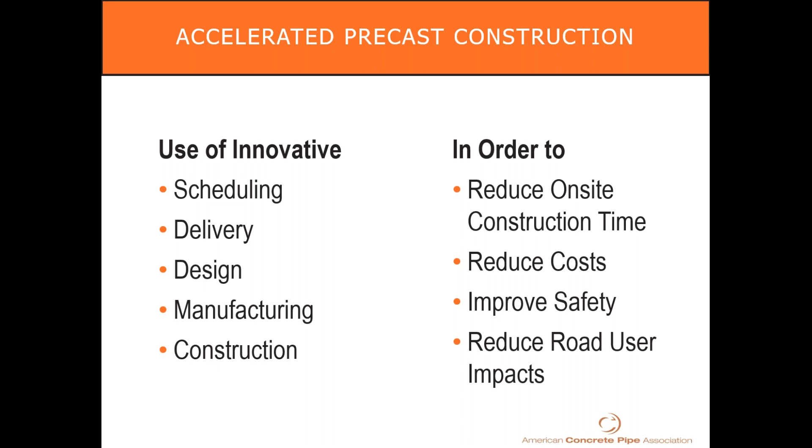Are the tables based on rebar or welded wire reinforcing? They're not based... well, they would be based on 60 KSI steel, but they're just giving you an area of steel for that 60 KSI. So if you were doing welded wire, you could still use the table and you'd be over designing, but otherwise you'd be designing to welded wire in your submittal.

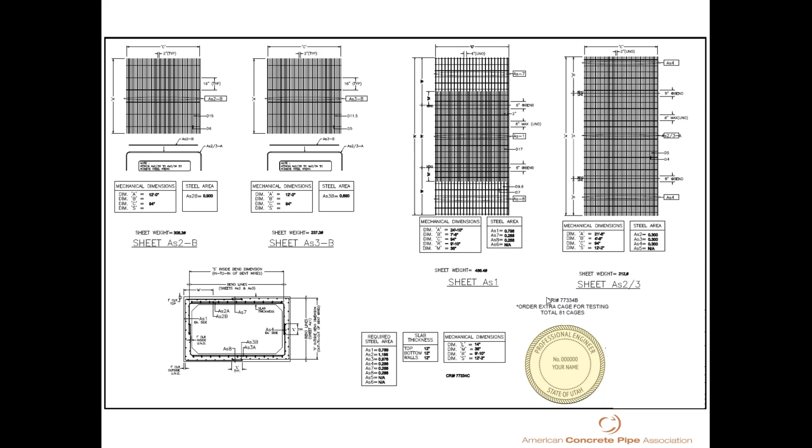Great, thanks Andy. Let's see, this one, I think it's talking about spacers. Are there ASTM requirements for clipping, or does it just have to be a minimum cover? I think you might be talking about spacers.

Yeah, the minimum cover required over the steel is 1 inch in most of these. There may be some exceptions in different places, but you're going to put a clip inside the form that's going to provide you with that. The manufacturer needs to put enough clips to make sure he can hold the steel in place, and it's going to vary based on how much steel you have and how much concrete you have and the different loads you have. The bigger the box, the more loading you have when you put that together, but you also have probably a stiffer steel in there.

So it's going to depend, and that's something where we would invite people to come into the plant. Your plants will allow you to come and inspect the boxes either while they're being made or after, and you can be part of the process. But rely on your manufacturer, they know how to do their QA, QC, and that's not going to be in any spec anywhere, I don't think, of how many clips you need to use.

The question was whether the outside cage has 1 or 2 inches of cover. I believe in some areas close to the ocean it may require 2 inches, but for the majority of the U.S. it's typically 1 inch of cover. There were some variations in the spec for real shallow sections or different locations.